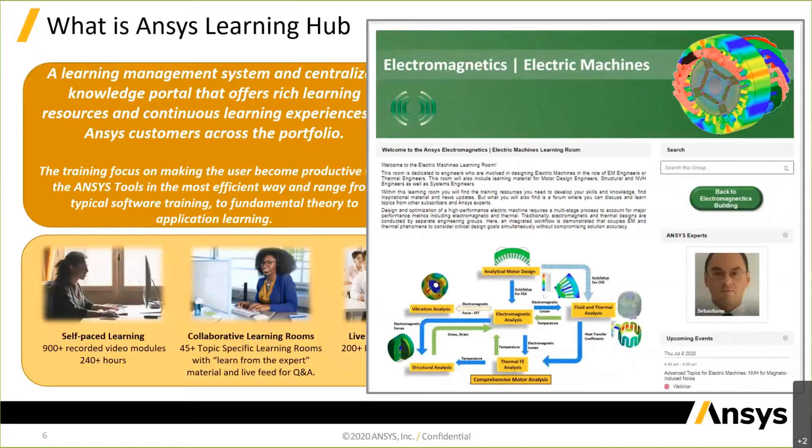So with all of that intro, today I will be talking about electric machines and the process from electromagnetic to structural to sound for the simulation of magnetic-induced noise. And this can be applied to other applications as well, but electric machines are certainly a hot topic here.

So what I'll be presenting today is a variety of topics, and I'll introduce the workflow for NVH simulation, and then describe a series of updates to our different simulation tools and our workflow that allow for highly efficient simulation. So these updates really highlight the benefits of simulation and accessibility of our built-in connections between these Ansys tools. And these allow engineers to really understand the noise impact of their design decisions. And then finally, I'll walk through an example to highlight the benefits of these updates and how that fits into the total processes here.

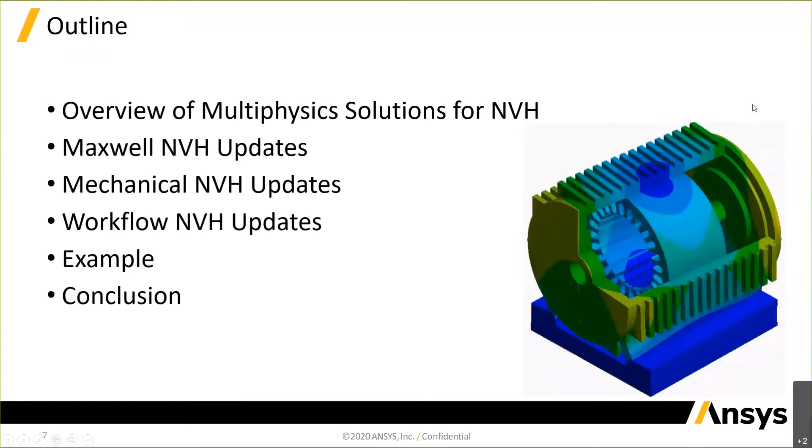So let me get a pointer up. Okay.

So NVH is one aspect of many multiphysics challenges for high-performance electric machines. Within the larger Ansys portfolio, we consider all these multiphysics challenges to aid machine designers. The first to mention, of course, is to understand the thermal performance of the machine in order to avoid damage in the windings and magnets, and the effect of these temperature dependencies on the machine performance.

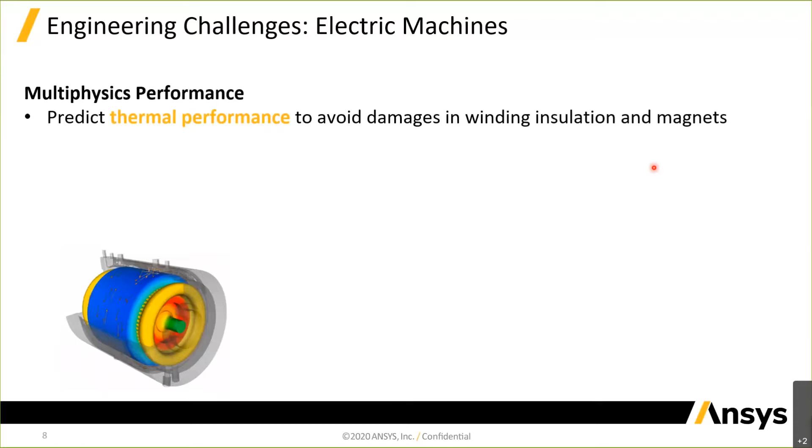The topic of today's webinar, of course, is understanding acoustic noise, and we will dive deep into this workflow. Within the realm of electric machines, this has become more important as electric machines replace components that often make much of the noise and with a much different noise signature, especially when we're talking about replacing combustion engines or reducing the amount of gearing or transmissions required in different assemblies. So the majority of your noise might be produced by this electric machine with its signature electric whine instead of the broadband noise sources of the past. And so it's a different challenge for acoustic noise in electric machines.

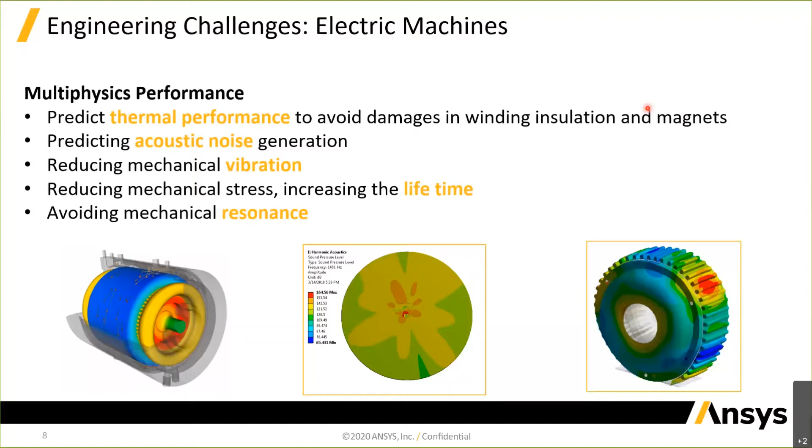And these first two points really lead into these subsequent topics in terms of discussing the mechanical implications of these vibrations, the implications of both vibrations and thermal stress on lifetime, as well as understanding and avoiding and suppressing mechanical resonances. So in all of these mechanical structural studies, the structural modes and damping need to be well understood, as well as the fixturing and bolting and how these need to support the entire life cycle of this multiphysics electric machine. And these are all challenges that Ansys helps our customers address through simulation.

So that's the high-level view. At Ansys, we approach this holistically with a suite of multiphysics tools that can be deployed against all these challenges, either together or one at a time. So in today's presentation, we will focus on the workflow here for magnetic-induced noise, which can be represented in a lot of different ways.

But we'll start with this workflow chart, where starting on the left-hand side, we have the magnetic simulation to calculate the forces within an electric machine. And this will produce these force waveforms that are based on the magnetic analysis, including motion and external drive circuits. So all the complications of a magnetic simulation produce forces, and those forces are then used in a dynamic structural model to look at the vibrations and forced response of the electric machine and fixturing. Then this structural vibration response is used as an acoustic source for radiated acoustic noise.

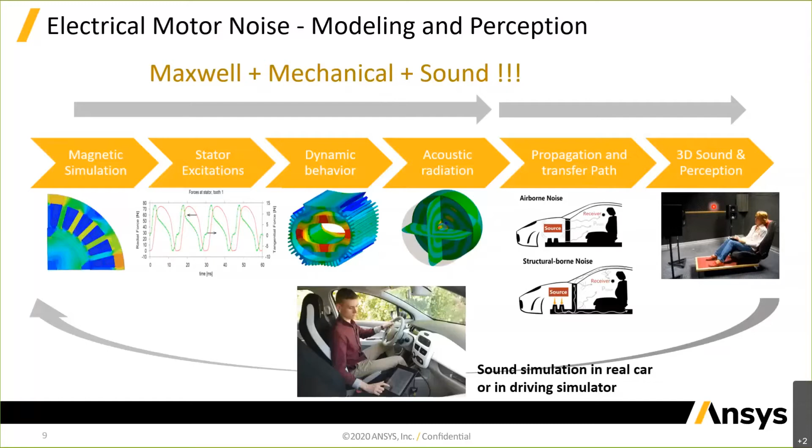The way that we support this workflow is within the Ansys Workbench to transfer and link together multiple models. So Workbench is a multi-physics tool, a connection tool to link together these different physics solutions, and it provides methods to transfer the geometry from one type of physics to another, as well as transferring fields and forces between different

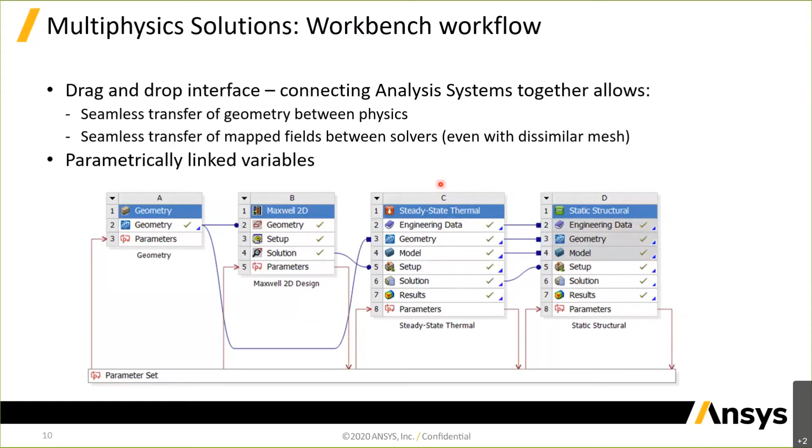solvers, even with dissimilar mesh, and like we see in this example here, could be a 2D magnetic simulation connected to a 3D structural, or it could be 3D to 3D as well. So it's a very flexible tool that allows a lot of efficiencies in the simulation process and allows other things like design variation and parameters.

The simulation challenge is how we bring all these components together efficiently to simulate and accurately predict these noise sources. So, of course, as I mentioned, there are many different contributions to noise sources, whether it's electromagnetic, mechanical, like gearboxes, or airflow, aeroacoustic noises like wind noise or road noise coming from the tires. So all these different sources could certainly be brought together within our tools.

Today, I'm focusing mostly on the electromagnetic forces which are produced by the forces within the air gap of the electric machine. So as the electric machine produces currents on each of these forces acting on each of these teeth to commutate and electrically rotate the rotor, then that produces vibrations and forces back on the motor.

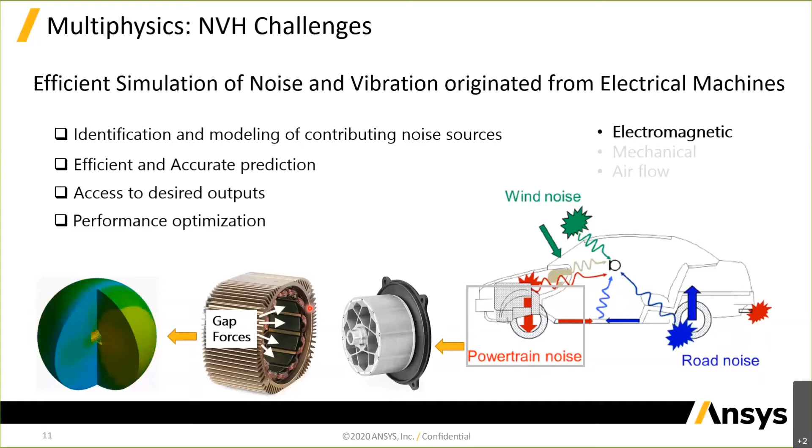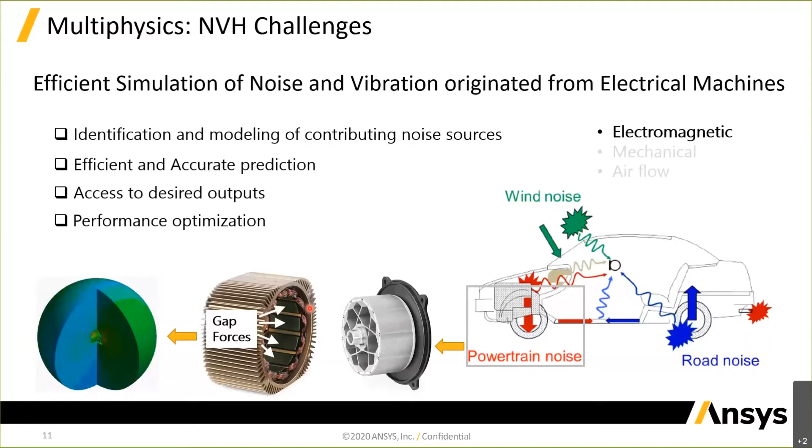So the key goal of our simulation is this flexible, efficient, and accurate way of combining all these different sources. And I think that's what I'll be able to point out to you in an environment that we can evaluate the desired outputs efficiently and bring it all together to perform optimizations and improve the sound and performance.

On the structural side, this requires modal analysis, harmonic response, fatigue. It can include a lot of different elements of this structural analysis. The workflow that I'll show both requires and provides insight into the structural response of the electric machine and the fixtures. And so this is integrated within the workflow. So we can start with a modal analysis to really understand the response of the fixturing and the housing. And then we also use that to efficiently produce the acoustic results.

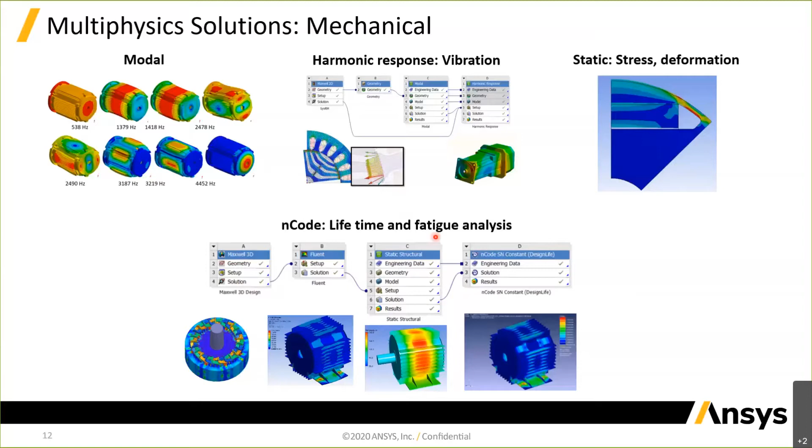So the other point about bringing up fatigue is that acoustic noise is often a symptom of vibration processes that can lead to fatigue failures. So we can link the harmonic vibration response, the force response, to a fatigue analysis and see what that cycling will do.

Once we have the structural response that's well understood, then it's a fast process to obtain a full waterfall diagram, for example, representing the multi-speed response of the machine. So we'll dig into the waterfall diagram in a few slides here. But our workflow provides methods of looking at multi-RPM magnetic models, producing forces for all these speeds, and then evaluating the structural and acoustic response. So that's the high-level overview, and we'll dig into how we do that.

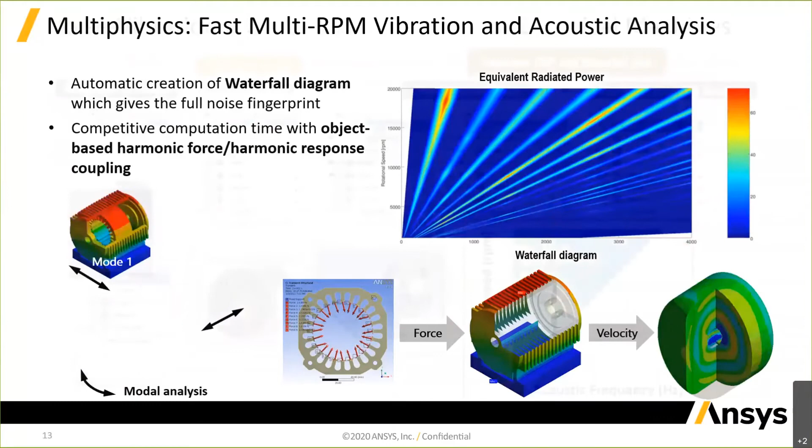In our Workbench environment, this is built up with these blocks. We have geometry blocks and our magnetic Maxwell blocks. And the solutions for the forces on our magnetic blocks are connected directly. Their forces are transferred to the forced harmonic analysis. And we see other blocks here that represent the sequence of the structural analysis.

So we can have a preload on our modal analysis. So this can be pre-stressed to get different vibration response. The modal analysis allows us to get very efficient speed and frequency sweeps for the harmonic response, as well as providing a lot of insight into the types of interactions that we need to either avoid or suppress with damping and other methods.

And then we can either use the harmonic response solutions directly or connect that into the acoustics module, which will provide sound pressure level as well as acoustic propagation.

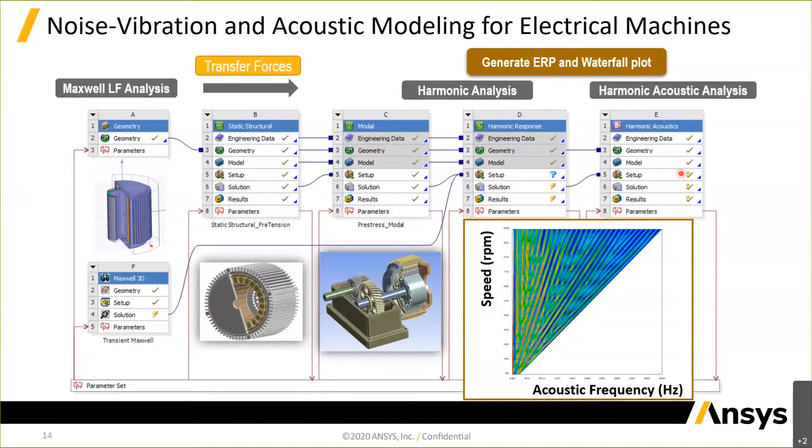So this waterfall diagram keeps showing up, and it's one of the key takeaways of this workflow for multi-RPM models. So let's dig into it a little bit and describe how it provides a full acoustic fingerprint for this machine. So we'll take a look at a couple different lines here.

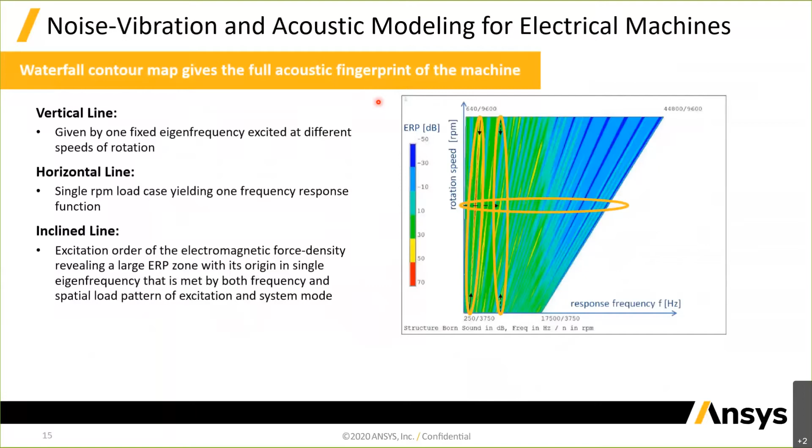So we do see a lot of information represented by some of the resonances that might show up on specific frequencies. They could be structural in nature. It could be caused by switching in the PWM drive. Or it could just be that there are strong orders that interact with the structure. So there's a lot of information represented by this one diagram, and we'll keep showing it for different cases. So I wanted to walk through that.

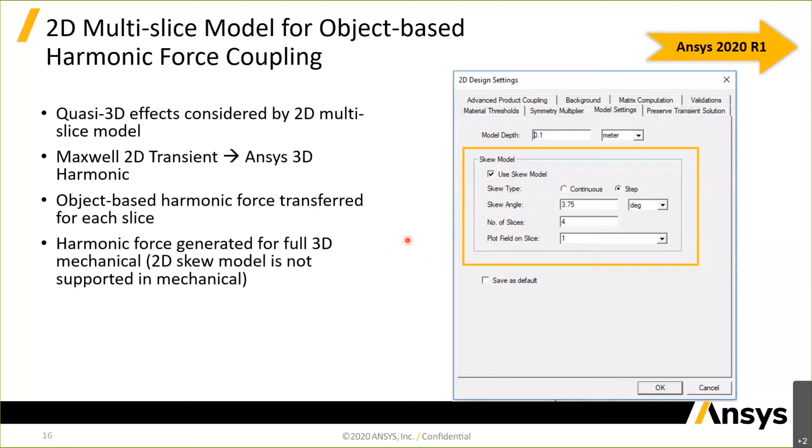So now let's talk about some updates that can bring about some efficiencies for modeling in electric machines. The first update is for the 2D multi-slice model. We've had this 2D multi-slice model for skew available in Maxwell for several versions, and we are making connections to this harmonic force calculation for NVH. When this skew model is enabled and we calculate harmonic forces in Maxwell, then we will automatically generate these harmonic forces for each slice of the skewed model. Then those forces will be transferred to the full 3D mechanical model.

So this is an example here. We would set up the skew model in Maxwell, assign the properties, and then once the harmonic force is enabled, it will be calculated for each slice, each layer of the skewed model, and transferred appropriately to the full 3D skew model in Mechanical.

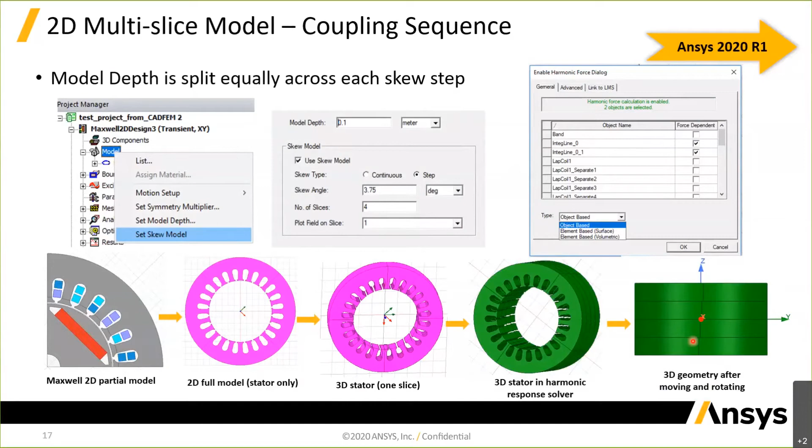Another thing that we're providing inside of Maxwell is some further reports for the frequency domain forces that are calculated inside of Maxwell. In the last several versions, we've added different capabilities for object force transfer, surface force density transfer, and volume force density transfer. All of these provide a lot of different options, different capabilities for modeling more complicated scenarios.

But we're adding these post-processing options in Maxwell so that you can really interrogate and see what those force results look like without having to map those into Mechanical. Of course, the mapping is done automatically, but now we're getting a little more insight into what those frequency domain force densities look like.

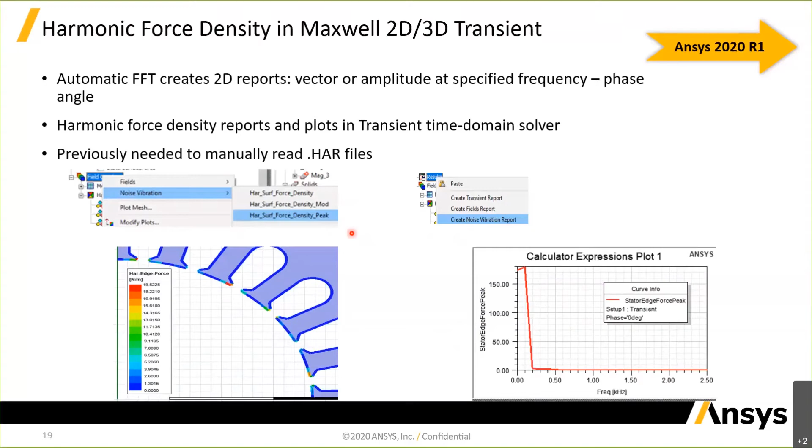Some other updates really help the efficiency of the solutions that we're going to look at. Any type of speedups will improve efficiency in our multiphysics modeling, and we've had a lot of really good speedups over the last several versions.

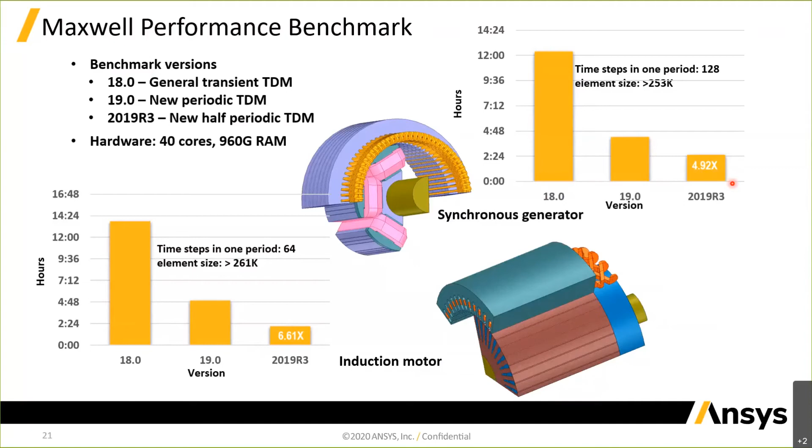The other thing that's really interesting is using Ansys in the cloud. We have built-in methods to launch the simulation software in the cloud, and it will solve and simulate and then send back the results to your machine. There are a lot of ways that this can be used for magnetic machine design of electric machines, as well as pre-solving Maxwell models that could be used for further multiphysics analyses.

So the cloud is not yet fully set up for all the multiphysics connections yet, but we can definitely pre-solve the Maxwell model in the cloud and then import all those solutions into any type of Workbench multiphysics analysis. So this can be combined with a lot of our HPC type of analyses to really give a good speedup. So in this case, maybe your local machine only has 8 or even 16 cores, and it's taking you 4 hours or more to do a large 3D problem. We could definitely speed that up on the cloud and get you results over a lunch break.

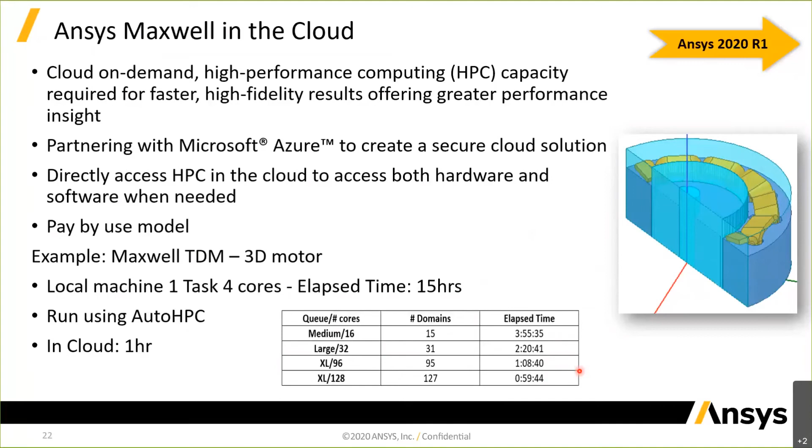So in addition to these magnetic updates, we have a lot of specific workflow enhancements, especially for the speed sweeps. Speed sweeps are necessary for these waterfall diagrams and a lot of other different cases that we'd want to see. So what we do with the speed sweeps is when we read in the load information, so load here is when we transfer data from one solver to another, we automatically read in all of the information that gets mapped from one solver to the other.

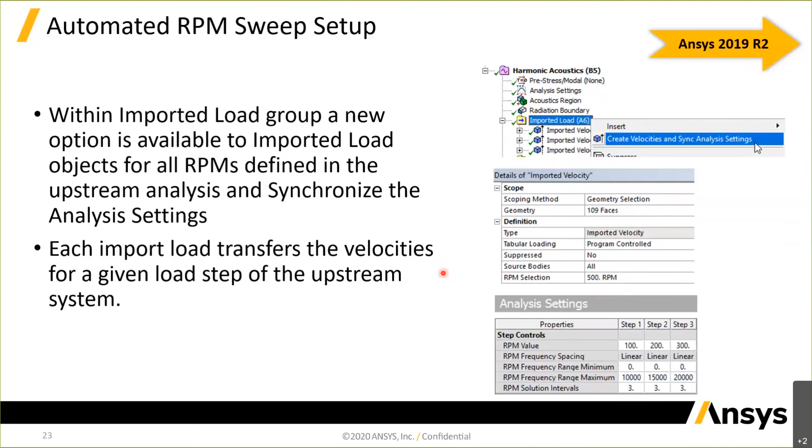And we also synchronize the analysis settings. So it will read in the speed and the number of frequencies, the frequency range for each speed, so that it's ready to solve. And you can always go in and adjust the solution settings, so you could do a subset of the frequencies if that's what you want. But by default, it's reading in analysis settings from the mapped workflow solutions, so that it's ready to go. And this really automates the process. It makes it a lot more accessible, a lot more relatable, and lets you see what the sequence of events needs to be.

Another really powerful update a couple versions ago is this built-in calculation for equivalent radiated power and equivalent radiated power level. What I really want to point out is that it gives a really fast estimate of the total radiated acoustic power that's based on the structural vibration. So we can get a signature of, if we install this machine in some open environment, how much total noise power is it going to radiate? We can get some idea of the worst case or the average case radiated noise, and this allows us to very quickly try to optimize the design to reduce that total noise.

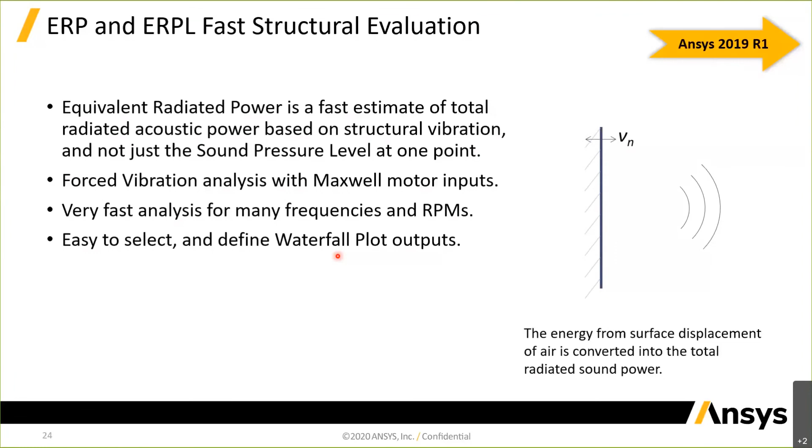And I bring this up because it's so easy to implement, it's so fast to calculate, and it produces very nice waterfall plots. So it's a really nice workflow feature that both mechanical and electrical engineers can understand and very quickly get to some way to design and simulate the acoustic performance of their machines. Of course, you can always go to the next level and do that acoustic analysis to get sound pressure levels and interaction and scattering of the environment. But this definitely produces a very efficient simulation.

Then one other simulation update that just came out recently, or is coming out very soon, is the RPM speed interpolation. This is one more case to improve the efficiency of calculating these forces so that we can calculate the sound. This allows us to enter a setting in the force transfer setup that will let us solve just 2 points. For example, in the constant torque region that we show here, maybe our current angle are identical across this whole range, so the forces are going to be almost identical across this whole range. And we don't want to have to solve at all these different speeds to produce this waterfall plot.

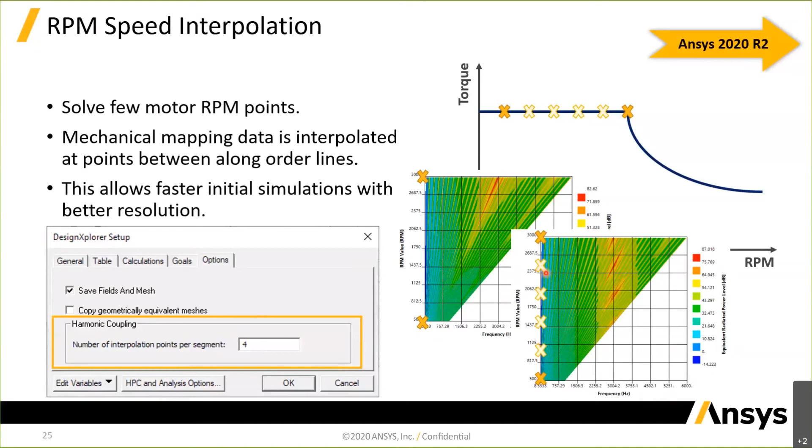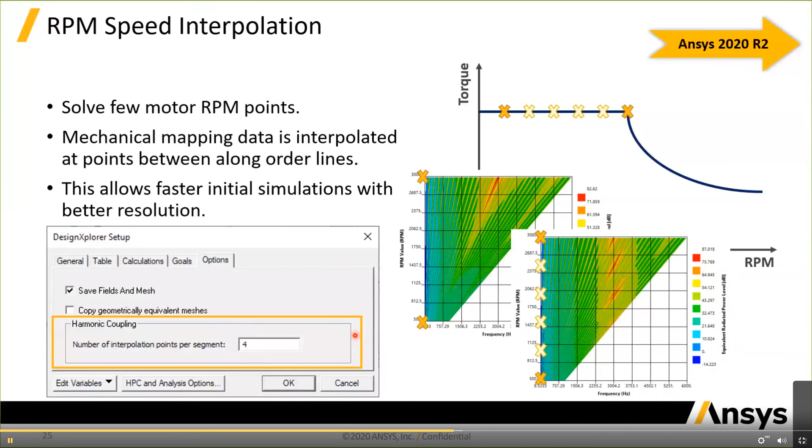But if I only choose a couple, then we're trying to very loosely interpolate between. So this setting lets us shift the frequencies, interpolate the frequencies between these 2 points, and provides a much more uniform waterfall plot. You can see the effect of not just solving at 2 points, but solving at 2 points and interpolating at 4 points in between. Everything else is done automatically by the software. We just enter the number of points here and then resync the analysis settings, and it automatically has all this information to solve and produce results.